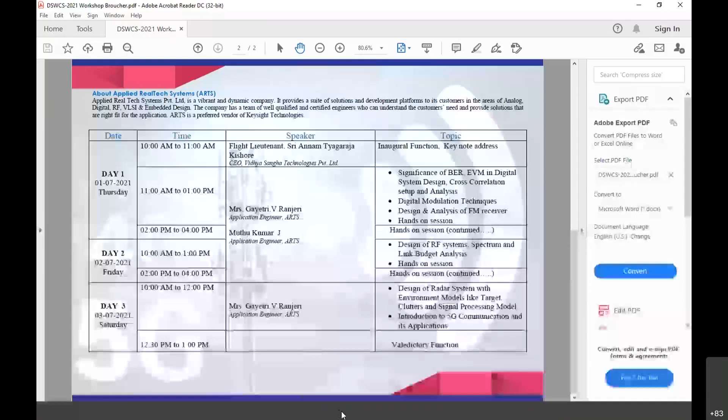He has acquired international exposure through working in USA, France, UK, Singapore, Hong Kong, Spain, Abu Dhabi, Sri Lanka, Australia, and New Zealand. Mr. Kishore is well versed in providing system integration, global service centers, pre-sales and post-sales support on 3GPP, OMA, IPTV, and many more. He has rich experience in advanced research in optics, IP, wireless, wireline, business process, governance, and budget management.

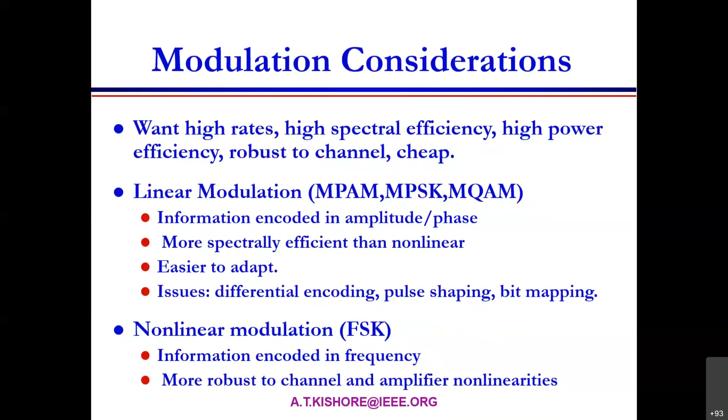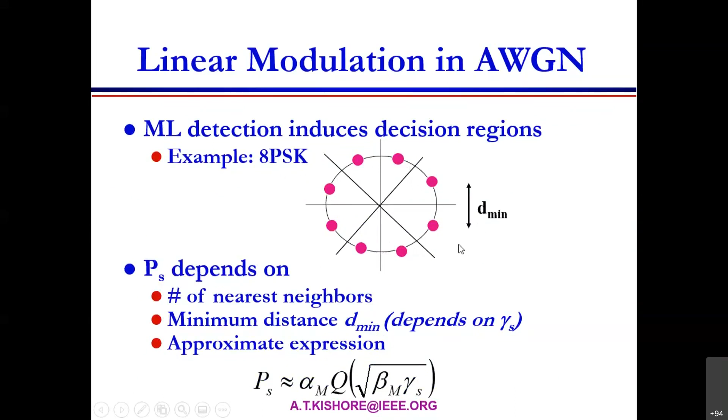These are examples of 8PSK, 8 phase shift keying, and the data conveyed here is 2 to the power of 3, which is 8. So using 3 bits, you generate 8 states.

These are some maths, and I would like to highlight there is also something called the Doppler effect. It means that if the transmitter is fixed at one place, like a tower, you won't see the Doppler effect. But if it is a train moving on a rail, and you are static on a platform observing the incoming train, you would see the Doppler effect of sound emitted by the train at its previous location and also at its current location.

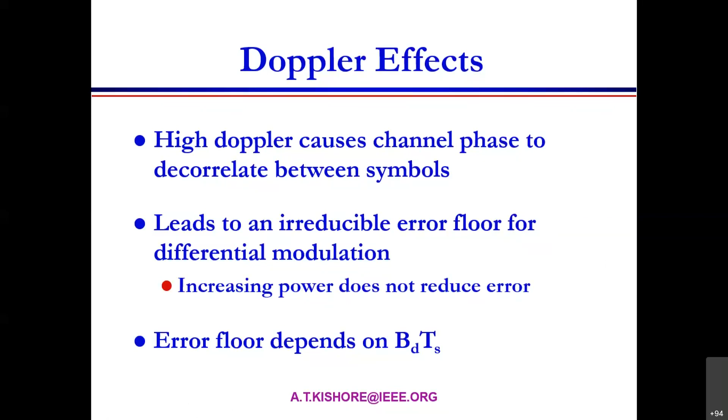There is an effect of overlap between them and beat frequencies, and so the Doppler effect can also be measured to give an indication of the movement of the object - something astronomers have also used to understand star movements. The same thing applies to wireless technologies.

Intersymbol interference, as I mentioned earlier, and capacity fading. To understand fading channels, in fact, that is what Indian spiritual masters tell us - that the world around you is full of noise, mithya. That's what technocrats also tell you, that the world around you is full of additive white Gaussian noise, and you need to get your signal-to-noise ratio resolved by meditation, dhyanam, and then you have to be sthita prajna. Typically that is how the wireless industry also gets down to the business of focusing on what you need.

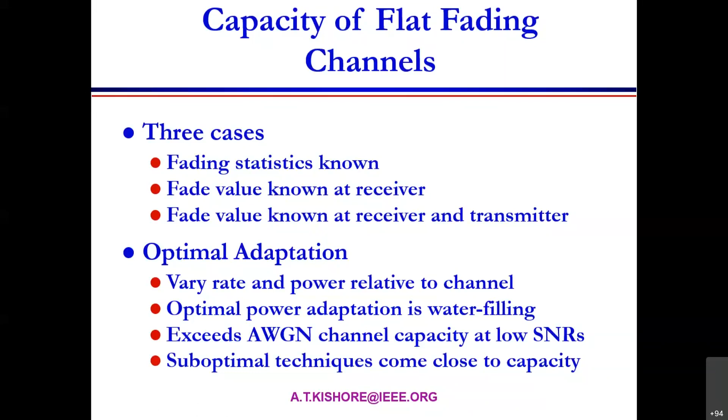This is how 16 QAM is very well articulated in these 4 quadrants, and you get 4 dots there. If you add all of them, it is 16 - 2 raised to the power of 4 is 16. So by using 4 bits, you can take a paper and pen, start with 4 zeros, and finally conclude with 4 ones. You will generate 16 variations of them, symbolically mentioned in these various colors here.

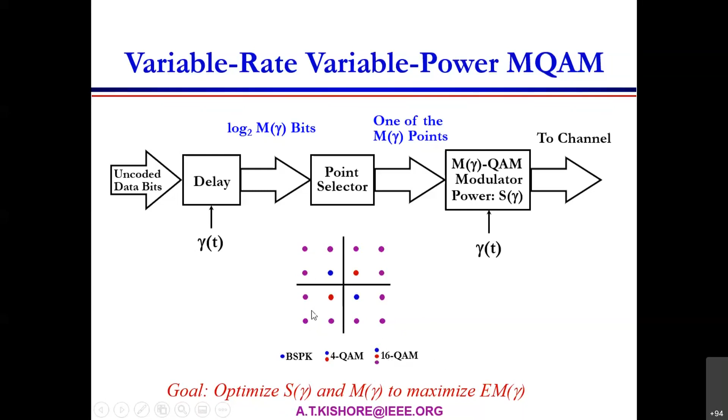And so this is the 64 QAM. When you talk about 64 QAM, keep all these 16 in one quadrant and populate the other 3 quadrants - then that becomes 64 QAM.

So basically, how do you go about wireless channel modeling? You have to look at the phase constellations, the power, the error in estimation, and the delay. These are the parameters that the test equipment will take care of to get you the signals you are looking at in your practical lab. We have to use techniques of selection combining, maximal ratio combining, and equal gain combining.

Maximal ratio combining is like what Warren Buffett or others well versed in the stock market do. The algorithms of maximal ratio combining go by which of the stocks you invested in are giving better results. You increase your portfolio and you arrive at the profits. This is the concept used in wireless processing.

So you have the explanation about how MRC, maximal ratio combining, works, and also selection combining.

Maximal ratio combining gives you like a 40 dB gain against the Rayleigh fading, which is the story I told you, like there is a mountain of ignorance and a heap of darkness, just like a volcanic explosion. Before our current civilization, there was one mountain in Indonesia that exploded, and the whole world went into a cold era.

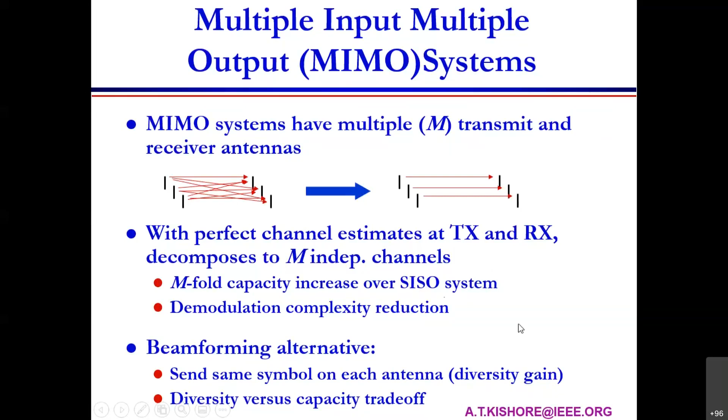So there are some more equations. I would like to talk about a few concepts. One is called OFDM, orthogonal frequency division multiplexing, and FFT, that is fast Fourier transform.

Any discussion about wireless or signal processing requires knowing about the life of Fourier. This was a boy whose teacher ignored his potential merits as a student, calling his parents to tell them their son was no good because he could hardly see anything, and that he was no good for studies and they should take him away. But later, this boy with imperfect vision opened our eyes to a lot of rigorous mathematical applications, without which most advanced technologies in DSP could not exist now. Fast Fourier transform is thanks to Fourier, Jean Fourier.

Similarly for OFDM, especially researchers and students, take a paper and I'll tell you the formula for the LTE OFDM philosophy in 3 components. The first component is 14,000, multiplied by symbol, and then 1200, again multiplied by 6. So these are the 3 components.

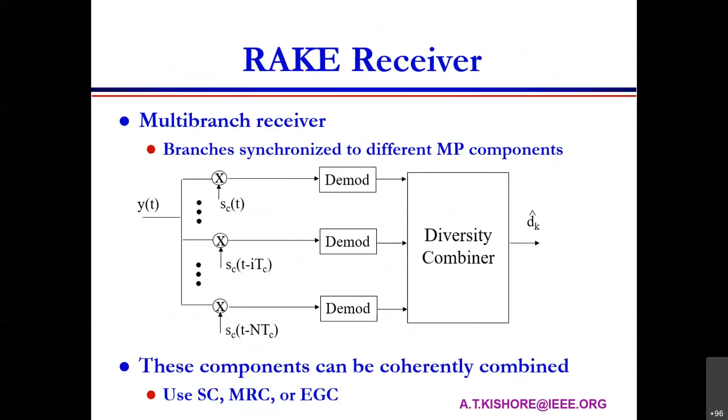The fading channels, we will go through more details—Dr. Gayatri will cover that. I just want to create an awareness that all these things exist, and I have a few more videos as well. First we will go through some and then see how much time we have to go further into discussion.

In telecom, Aloha is a very interesting concept. It means when randomly many people try to access a channel, especially during a random access attempt, the Aloha algorithm creates randomness so that no two mobile access attempts collide. Their attempts are randomized so that there is very little collision.

This is a very interesting diagram of cellular technology. GSM gave birth to the hexagonal design pattern. When it comes to 5G or LTE, every hexagonal pattern uses the same frequency like any other hexagonal system. You distinguish one user from another using codes which identify the base station, the device, and the channel—three codes in total. One identifies the tower, another identifies the device, and another identifies the connection between device and tower. These three codes help mitigate the fact that the same signals are used around by all other towers.

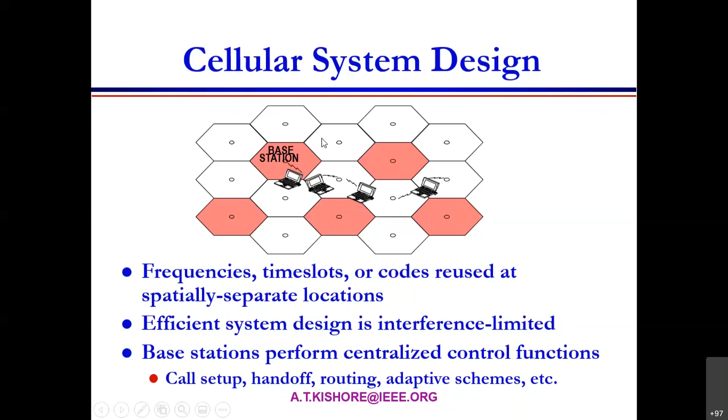That is the concept. In case of GSM, there was a requirement of frequency planning, but in 5G, LTE, or WCDMA, there was no need to do frequency planning.

These are some design considerations, because these three day talks are all about design considerations. So you have to know, let's say you are designing a fresh 6G network for Bangalore city—5G is already taken care of by telcos, 6G is a research topic, for example. How do you go about designing 6G? You have to know the reuse distance, the size of a cell, the ways you get interference, what kind of antennas, what power levels including antenna gain, whether there are multi-user detection technologies, and how resources are allocated. If you know these things, you can even model the 6G technology. By the way, 6G is a combination of terrestrial and non-terrestrial, typically used in satellite communication.

Resources in wireless include channels and bandwidth. For example, GSM is based on 200 kilohertz channel bandwidth baseband. CDMA is based on 1.23 megahertz channel bandwidth of baseband. 3G is based on 5 megahertz or 3.84 megahertz baseband channel, and LTE is based on 20 megahertz baseband channel. 5G can have various spectrum baseband allocations even beyond 20 megahertz, which is standard for LTE.

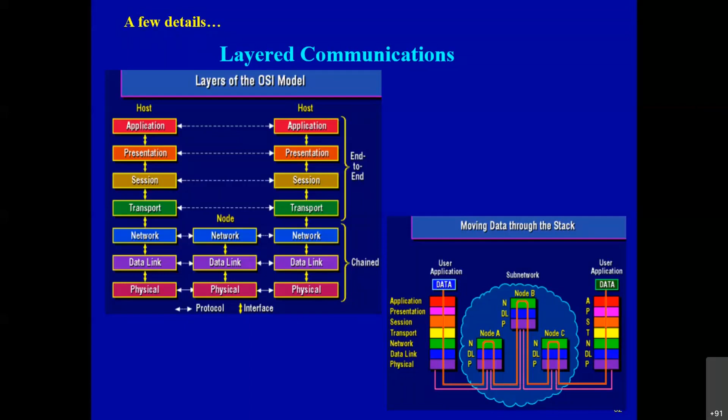Every channel will have data that gets encrypted and transmitted, and there is propagation, and the receiver will remove the noise, then decrypt the data and get the intelligence back. So this is the typical flow of any communication channel.

I would now spend a few more minutes on 5G as it is being introduced worldwide. There were unintended consequences of movies like Robo 2, even in the Western world. It is okay that villagers may get influenced by such a movie and think birds are killed by 5G and want to destroy wireless towers. In the movie, the hero destroys one wireless tower and feels triumphant, but there are millions of towers and billions of users, so that story is not scientifically valid. Wireless is not causing harm to birds as you perceive. Birds may be at danger due to various reasons, and radio communication could be one of the sources, but not just 5G.

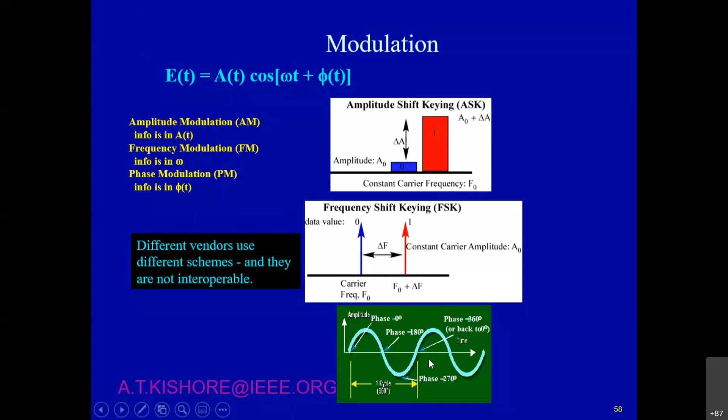Starting from here, you will now roll out amplitude shift keying, frequency shift keying, phase shift keying, and QPSK. All these technologies work by manipulating the amplitude A, the frequency omega, or the phase phi, and that is how you get ASK, FSK, and PSK modulation standards. And this is the global frequencies electromagnetic spectrum, starting from 0 hertz to infinity.

Industrial, scientific, and medical bands have been opened up for free. Our WLAN is based on 5.3 gigahertz, and 2.4 to 2.5 gigahertz is allowed as a free band without license fees. All these frequencies are used in various applications: 433 megahertz typically is used in drones, 915 is used in GSM, and 2400 megahertz is used in WCDMA and also WLAN.

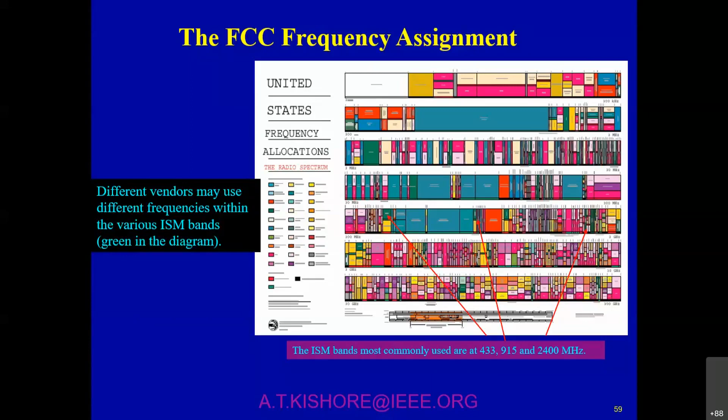The tiny sinusoidal waves which are orthogonal to one another - you bring out 1200 of those waves in 20 megahertz. So out of 20 megahertz, take 1 megahertz to the left and 1 megahertz to the right, and you are left with 18 megahertz. Divide 18 megahertz by 1200, you get 15 kilohertz. That is a sinusoidal wave known as a subcarrier.

So beyond FDMA, TDMA, CDMA, we have OFDM, which is used in LTE, and 5G New Radio uses a flavor of that with variations in the slot duration and also subcarrier frequency baseband allocations.

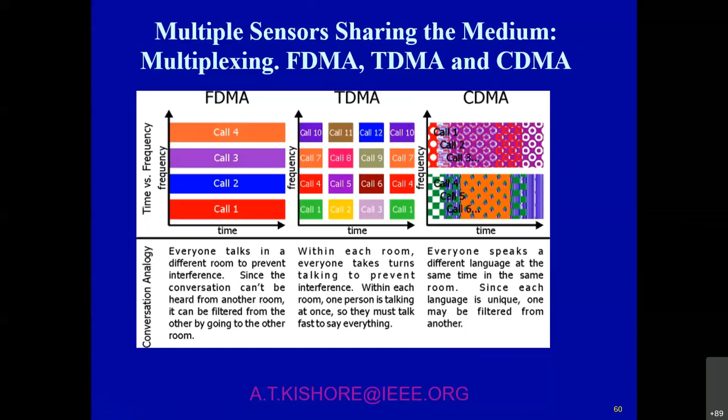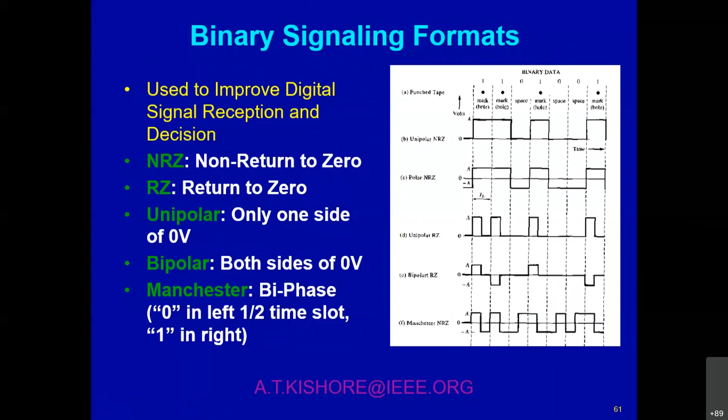As I mentioned, the lady Hedy Lamarr was wife of a Czechoslovakian army officer, and she was a host for her husband's guests - living-in officers who came to seek advice from the senior officer who was married, and spend time socially. She was serving food when they were having conversation, and they were talking about how to attack my enemy by randomly changing my transmit frequency, and again change the time at which I transmit, and change my location from which I do my attack.

All these concepts of randomization, like direct sequence spread spectrum, frequency hopping spread spectrum, which became a basis for WLAN as well as for CDMA, was originally a thought process that Hedy Lamarr gave to the patent office, which was utilized by the militaries.

When America had a challenge from Cuba, Fidel Castro was challenging Kennedy, the president of America, that he would use Russian kind of technologies with missiles and destroy entire America with their missiles. So they used the white paper written by Hedy Lamarr in terms of creating defensive channels, and used it in an aircraft, and in the jamming pod they went into Cuba and nullified the radars which could no longer see the incoming flights. Then these flights were able to see the radars and destroy the radio communication systems. So modern warfare is that ability of the enemy to wage war - electromagnetic warfare.

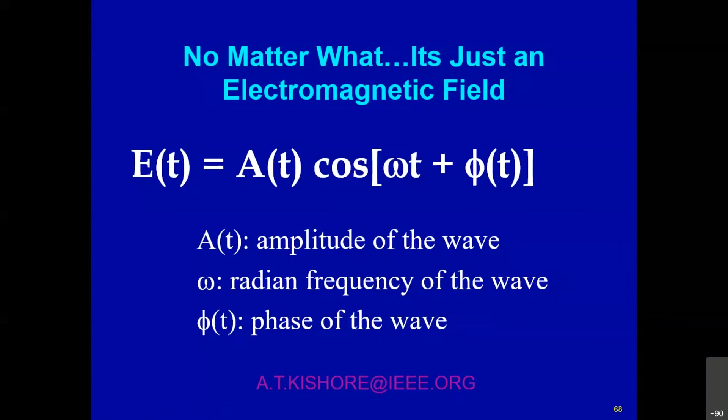This equation is the parent of all wireless channels, just like classical Newtonian equations are for physics. At one point, the world was thinking seriously about WiMAX. 802.16 happened to be the next layer after WLAN, but it did not really take off, and that was replaced by LTE, as you all know. Now that is again being replaced by another layer on top of it, the 5G layer.

These are some of the traditional computing networks, like routers. In the future, there will be very little distinction between telecommunications and packet data internet. So they will both be the same.

So when Dr. Gayatri and others take you through a lot of discussions, they will also talk about computational fluid dynamics and other tools like ANSYS, SolidWorks, COMSOL, and various tools on MATLAB.

In fact, we work with a few tool makers to help the emergence of the ecosystem, like incubation centers. I'm one of the Niti Aayog's Atal Tinkering Labs Mentor of Change, and also for Smart India Hackathons. I'm part of Bureau of India Standardization for the UAVs.

We welcome any expression of interest from researchers. If they want the license keys for about a year, we are ready to give them free of cost if the need is genuine, which when purchased would be of the order of something like 66 lakhs for a number of users. We are doing this in the interest of the ecosystem, and we are partners with a number of tool makers. So with these few words, I have a lot of other videos as well.

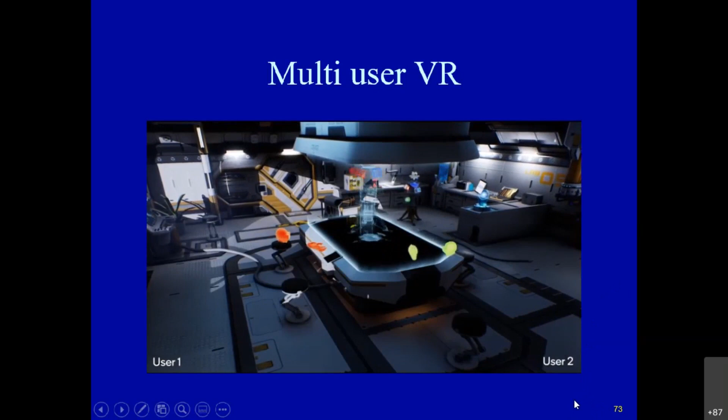We're showcasing multiple VR use cases, including multi-user collaboration and gaming running on a single network. As you can see, users 1 and 2 are in a multi-user VR collaboration, while user 3 is using a VR gaming application.

We now illustrate the processes involved in a boundless VR system. The VR device sends 6 degrees of freedom head pose data to the edge cloud over 5G. The edge cloud processes this data and renders a new image, then sends the compressed image back to the device over 5G. The device further processes the image before displaying it.

The time taken for this round-trip process is called M2R2P, or motion to render to photon latency. The 5G round-trip time is a key component of M2R2P. High latency causes user experience degradation; the user may observe warped objects or delays in the appearance of new objects. Low latency can remove such errors.

We now showcase how our end-to-end 5G optimization allows us to meet the stringent low latency requirement of multi-user boundless XR. In this example, all 3 VR players are using the NVIDIA Cloud XR solution and experiencing 2K by 2K resolution at 90 frames per second. The 5G round-trip time is kept below 20 milliseconds, and the average 5G downlink throughput is about 50 megabits per second.

In real-life deployments, RF and interference changes are a frequent occurrence, which can cause performance issues and latency spikes. In this example, we see a VR user being blocked from the gNodeB by another user, causing a sudden spike in 5G round-trip time for the baseline 5G system. Our 5G optimizations help minimize the latency spike, providing a seamless user experience.

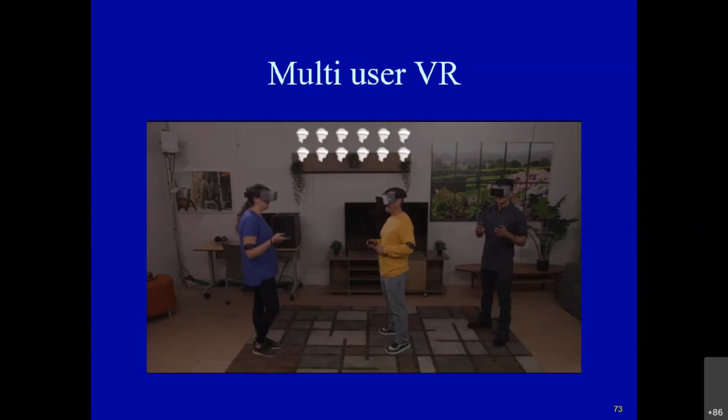We have an exciting path ahead to evolve the boundless XR system to include larger networks and augmented reality use cases.

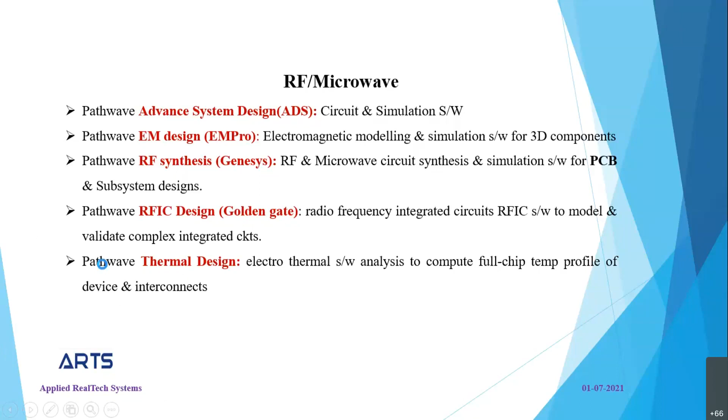So I'm going to give a brief about advanced system design, and then I'll continue with the system level design, with respect to RF and microwave. So this is how ADS looks, and this is system view.

So I'm going to cover the entire content that madam has designed, which EIT has designed, using system view. I'll just give a brief about ADS.

So we have, like I said, this is how it looks. This is Golden Gate. So in this software, what is the simulation technology that it uses?

We have all these softwares, all simulation softwares. ADS is also simulation, system view is also simulation, EMPRO is also simulation, Golden Gate is also simulation. But what simulation are you going to do? It gives an accurate result with respect to your design.

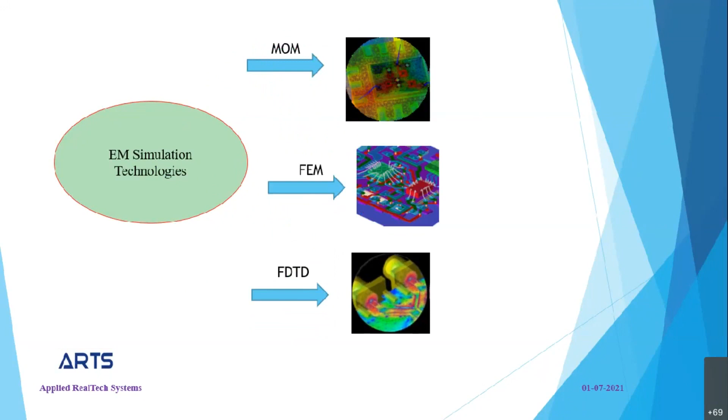So we have different simulation technologies that all the software uses. One is method of moments, another is finite element method, FEM, and another is finite difference time domain method. So we have 3 different technologies it supports.

ADS supports this, and when you use ADS with EMPRO, it supports the FDTD method. You can design your antenna in EMPRO as well as in ADS. Once you design your antenna in ADS, that can be called in EMPRO so you can do simulation using FDTD method.

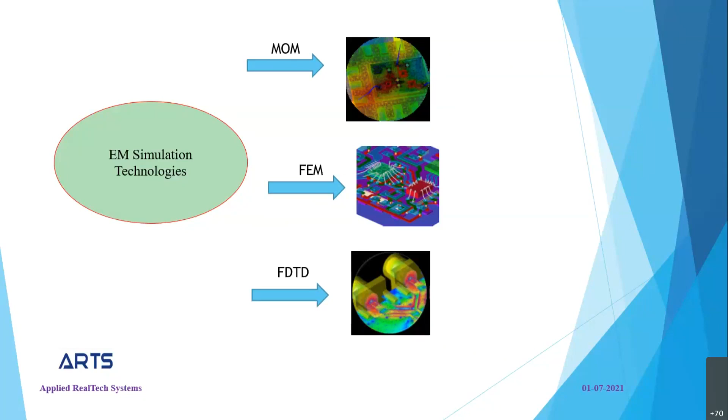So this is just a basic difference about method of moments. It is used for planar and passive circuits. FEM is also a frequency domain method, and it is used specially where packaging is done and wire bonds. And finite difference time domain is a time domain method, used where the wavelength is large, such as antenna.

So I'll just give a brief about ADS. It is very much easy. It is an electronic design automation tool, which can be used for RF design, microwave design, high-speed digital applications. It is also used for designing circuit design, and for layout.

It can be used for co-simulation. It is also 3D EM technologies. It is also used for IC packaging and PCB. And it also supports different types of library files, for example radar satellite applications, it can be used.

So whatever features I've mentioned, I'll show in terms of figures. So first point is, it is used to capture the schematic, and it also used for designing, you can do layout design also. And it is a system as well as a circuit simulator.

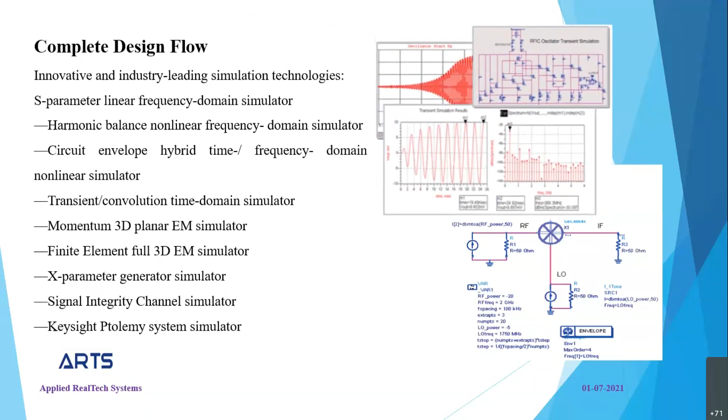So this is exactly how your graph looks when you're going to design and when you want to display and see the result.

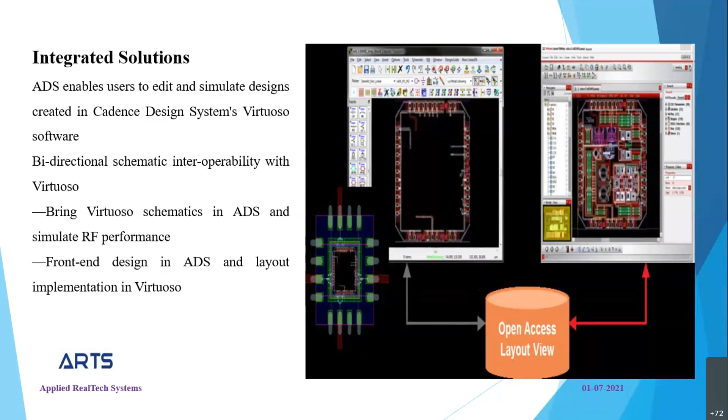It can be integrated with different vendors, such as Cadence, Zuken, or Mentor Graphics. And nowadays, even Synopsys is supporting this, Synopsys is also in hand with Keysight currently.

And these are the different foundry partners. What we are doing here is with a third party for what you are going to design. For example, if you design your circuit, say a basic capacitor, the value it produces can be checked with your third party, that is called a PDK file.

We call it a PDK, that is process design kit. You can transfer files with PDK files, that is ideal values with respect to your design value.

So, no optimization technique. In ADS, we have different optimization techniques, 12 optimization techniques we have. We have a cockpit which modifies the value with respect to your design, and then it will give a display. You can see in this box there's a green color which is modified, and the value is modified here, that can be seen.

So this is optimized. We have different types of optimization techniques here. According to your design, you can use different optimization techniques such that you get a proper desired result according to your design.

So if you want to design an antenna and simulate FDTD, that is finite difference time domain, then you have to have EMPRO software with ADS. Then only can we simulate FDTD.

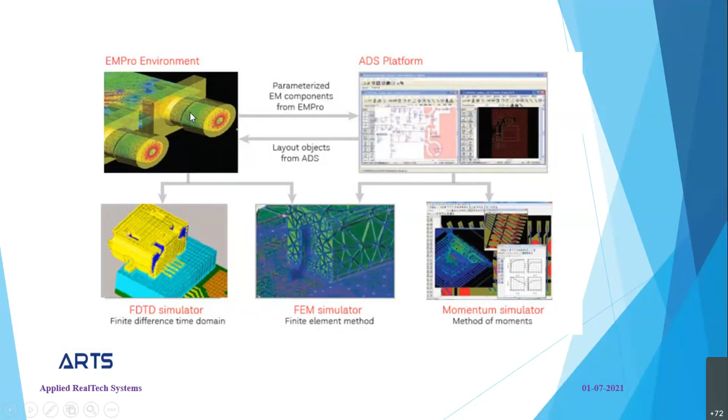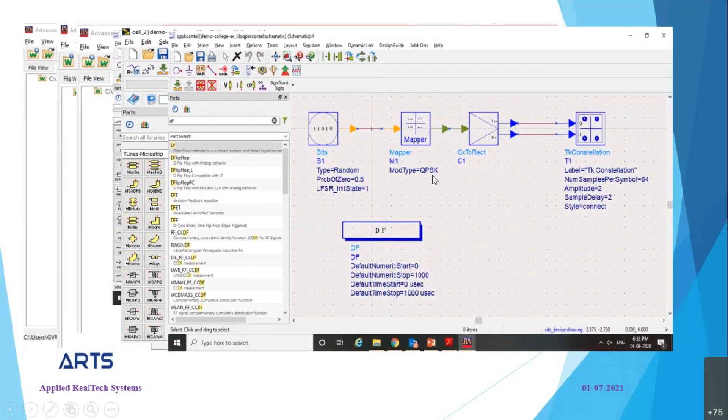So this is one example using QPSK, you can see a basic, normal system level design can be done, not the higher end, but to some extent we can do system level design even in ADS.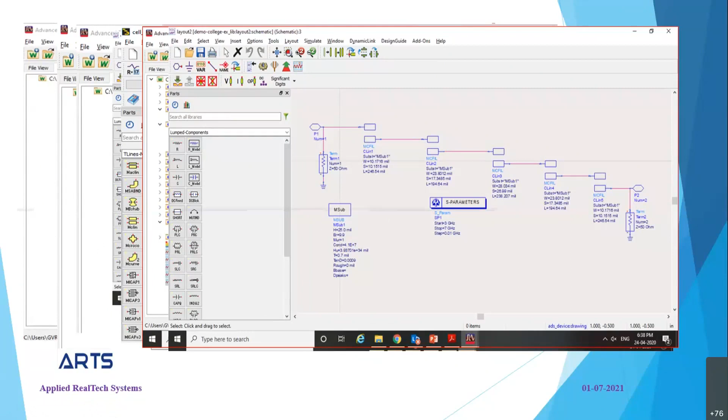Just go for this, this is layout. Just click on layout, generate. It will generate whatever the schematic has been done, the same thing appears here in the layout. Everything is just converted into layout with one click. So this is where you display it.

You can see different types of display for your result, like using a Smith chart, rectangular plot, or you can write your own equation. You can also form a tabular column. Everything can be done here.

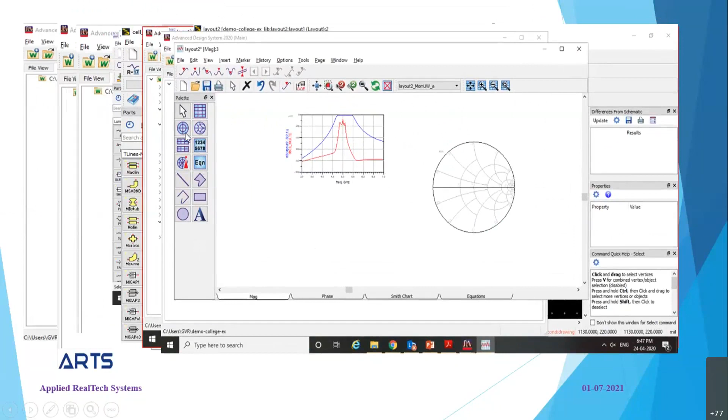So this is one antenna example design, a patch antenna example design. There are multiple antennas, some cross designs. So this is about the ADS.

This is actually the basics about the ADS. So who all can use this ADS? These are the people who can use it - RF and microwave designers, especially board designers, system integration designers, power electronic designers, signal integrity designers, MMIC designers, RFIC designers. This ADS can be used by all of them.

So aerospace and defense people, MNC people also use it. Even in education, some colleges are using ADS. So ADS can be used for UG projects, PG projects, as well as in research for simulation, and it gives proper accurate results for your design value.

You can check and cross-verify your design value. If you are not getting a proper value, then somewhere you are making a mistake while selecting the value of a particular component. And this ADS can be introduced in any of your laboratories.

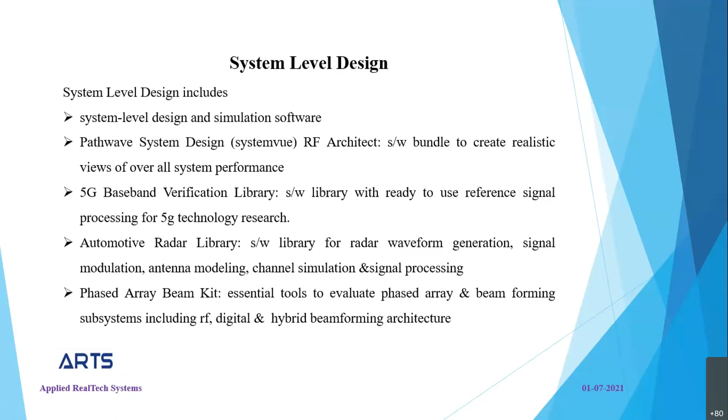So what exactly is the SystemVue? SystemVue is nothing but a simulation. It is a simulation platform. It's a system simulation platform.

Where it can be used with respect to the baseband and analog or RF design, or different types of channels, where we can design all these things. So I said, no, this is a simulation platform. We can use it for baseband, analog RF, and different environments.

So what are the target applications for this? We can use it in aerospace and defense. You can use it in upcoming communications like 5G, and even for 6G the library files are still being built, so as days pass we'll get different library files. And even the current trend is automotive, we can use it there too. For example, in automotive, you can use it for radar or communication or vehicle-to-vehicle communication. That part also we can do here.

So who uses SystemVue? Wherever you are in the design, at the base level or the architecture level, or at system verification, you can use it. So whether you are at the system architecture level, the baseband level, or doing system verification, there you can use SystemVue. Wherever you are in the design, no worry, you can use system level design.

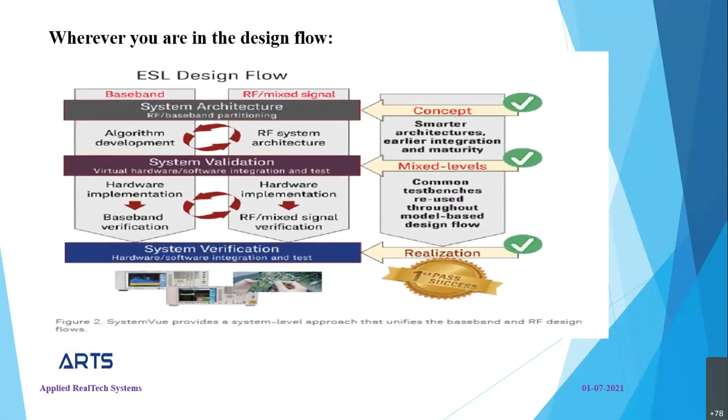I said, no, wherever you are in the design flow, it will support. SystemVue can be integrated with different tools, like I said, it supports MATLAB, it supports different measurements, and it supports different types of software available with respect to any hardware components, and even hardware designs it supports. We can call these instruments in SystemVue and check your real-time signals, whatever you have designed.

For example, this is one example, a screenshot taken for radar design. If you want to do radar design, you can create a radar system level design in SystemVue. Once you create a system level design, if you want to see an animated signal, meaning an animated kind of design, then we can use STK from AGI. STK software, where we can see an animated signal, animated kind of models.

For example, we can see the aeroplane, that kind of signal, to see what is the clutter, meaning the target, whether this target is reaching the radar or not. That part we can see in terms of animation using STK.

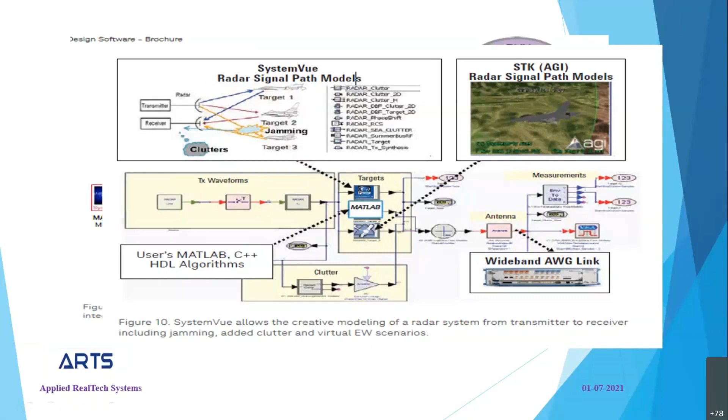This SystemVue also supports third party software. That is what this indicates. You can do coding using C++, HDL, or MATLAB. And this is a phased array.

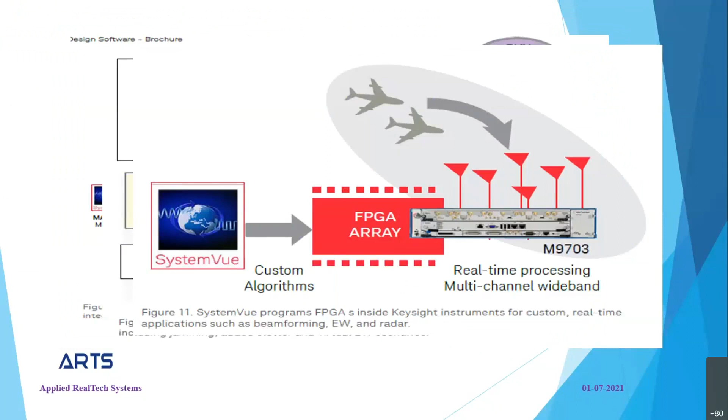So what are the capabilities of SystemVue? It is very accurate, and it is faster compared to other software. It is more speed and very accurate, and it's flexible also. And it even keeps track of all your designs. For example, if you already run 8 designs and close this window, when you open it again, it will display all 8 designs available in the main screen window. And it is very easy to use.

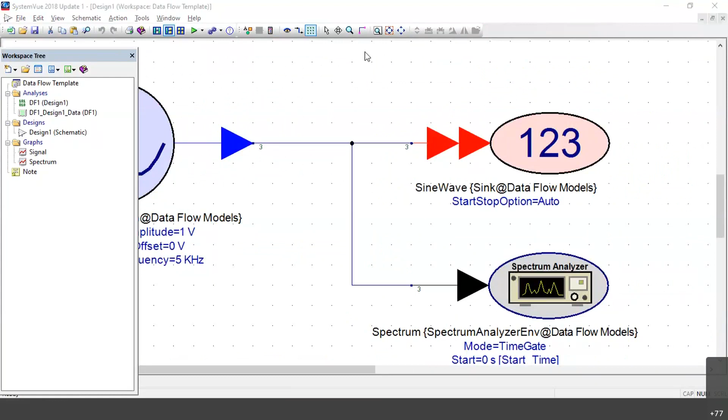See, when I pressed on the template, this is what it's showing. I'll close this all. See, this is a data flow template - it gives notes, meaning a description about the data flow design and how it can be created. And this is your schematic. I'll just fit the window.

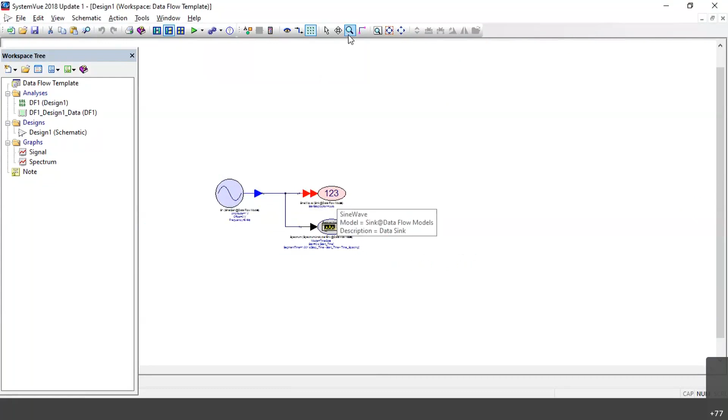See, in the schematic, what is there? Just one sine signal. Then you are going to see the output either in terms of spectrum or the normal signal. I'll zoom this - see, what is here, one sine signal. Then this is your sine wave, and this is your spectrum analysis - you can see it in terms of spectrum or the normal signal.

I'll minimize this. And then this signal is showing - this is a 1 to 3 sink. This is a normal sine signal that we can see with a different time scale and a different amplitude.

This is the output of a diode? No sir, it's just an example of a sine signal. No, not a diode? No madam, sine signal - you are giving where?

This output spectrum is of - sir, this is a schematic. This is where I took a sine signal. I'm not doing anything, just displaying a sine signal in terms of a spectrum and in terms of the normal sine signal. This 1 to 3 represents the normal sine signal, and this spectrum analyzer expresses it in terms of the spectrum. Fine sir?

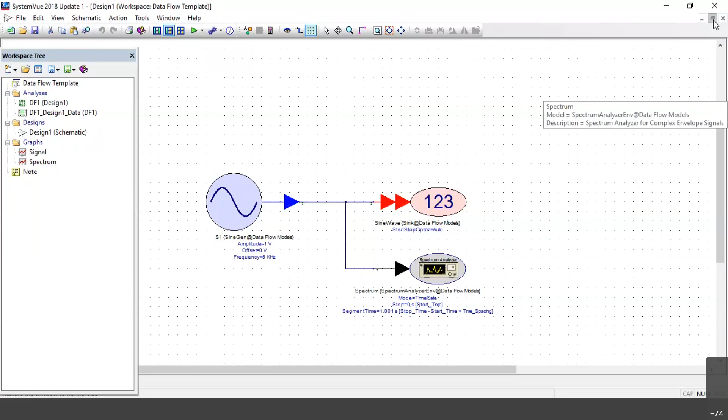Thank you, yeah I see sir. This is in terms of spectrum, and this is in normal 1 to 3. It is in the output.

I just took one template. I'm not designing anything, I just showed what exactly the template looks like. The template gives complete information about the particular design, basic designs.

So once this is done, these are all the things it gives. And here in the workspace, we can see the name of your file. This is a data flow template, and what type of design - your design is a schematic. This is your design, like an amplifier design.

That is, it is nothing but the simple amplifier, right, so or the op amp I can call it. So this is a design - the name of the design is design 1, and it is a schematic.

Once you run this, you will get an analysis. And in analysis, what all does it do? It will display all your required results. I'll just press on this.

See here, you can say start time and stop time, sample rate, number of samples. Number of samples can change according to things. These are the samples that can be chosen here. And what is the time spacing and frequency resolution? See, these lines correspond here. If any change happens in any of these things, there is a change. For example, if I change here to 128, see, there is a change.

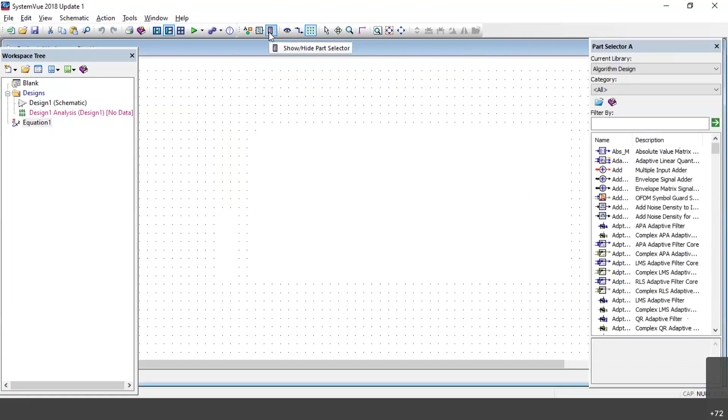Analog devices, right, with respect to system parameters, automotive radar parts, Bluetooth parts, CDMA parts, CDMA 2K parts, Coilcraft, custom - there are multiple things available. This is an instrument, Flex OFDM parts. This is one instrument that can be integrated, so that can be used to see your result also. So GNSS parts, GSM parts, different HSDPA parts, LTE, MIMO, radar, RF design, WiMAX, WLAN.

So currently it supports different WLAN parts, fine. So these are the different parts that are available, fine. And even my system, my software is the 2018 version, so it is not showing 5G library parts currently. So these are the different parts available that can be used, right?

Again, if I say general or all in category, if you don't know any part numbers properly, you can use all, and then you can search here, filter by. If you know particularly what you want to use, with respect to adaptive, analog RF, beamforming, or code generation, there are different instruments available for use.

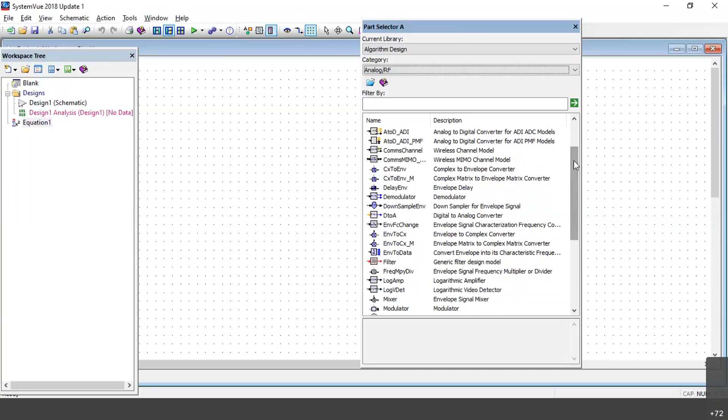Earlier it was there, madam, can you expand RF design in that, it may be wireless channel? Can you expand wireless channel now? Yes. Previously it was there. Is it in the current library? No, in communication, I guess. Channel types, what channels are available? Madam, these are the communication, comms channel, wireless channel model.

Madam, if you installed it, you can go through it, I'll give some time so you can look through it, and if you're not able to find what you're looking for, let me know. These are the different things available in different library files. If you know what exactly you're designing and what's needed, you have to select the library files, and these are the things available for you to use.

It's not only communication, we also have adaptive equalizer, RF, and beamforming. For example, if you go for beamforming, we have transmit array, S parameter, we can do modeling of the S parameter, envelope matrix delay. There are multiple things there, madam. I'll give some time so all of you can go through the part selector to get familiar with these things.

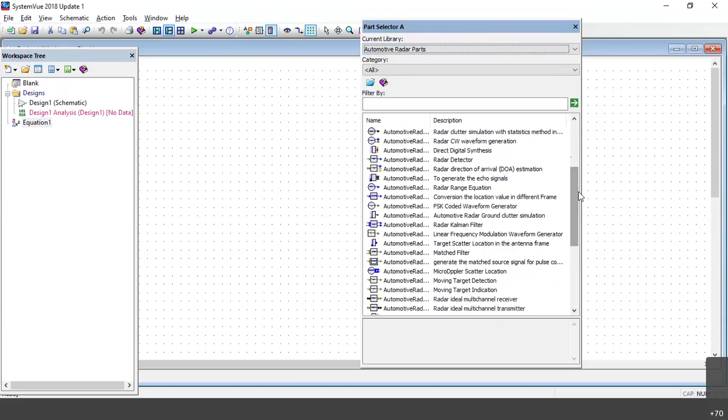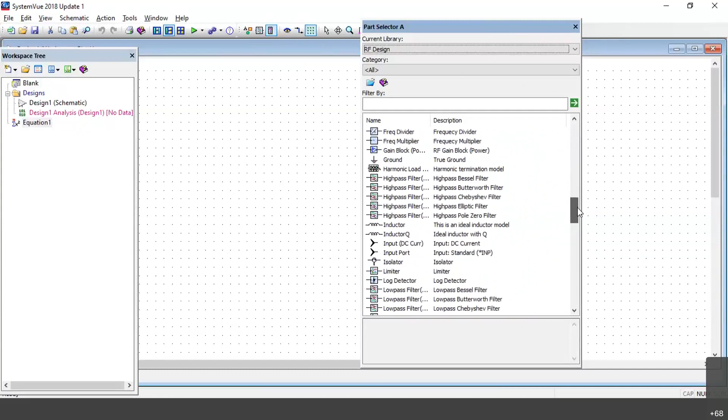If I go to automotive radar, again there are different things with respect to only automotive part, so we can use all those. Even for RF design, we have different RF design parts here. For example, attenuators already exist, bandpass filters, different filters, and coaxial cables are there. If you know which coaxial cable you want to use for your design, that can be used. We also have dividers, different switches, different ports, detectors, and limiters. Many things are there. I request all of you please go through this part selector.

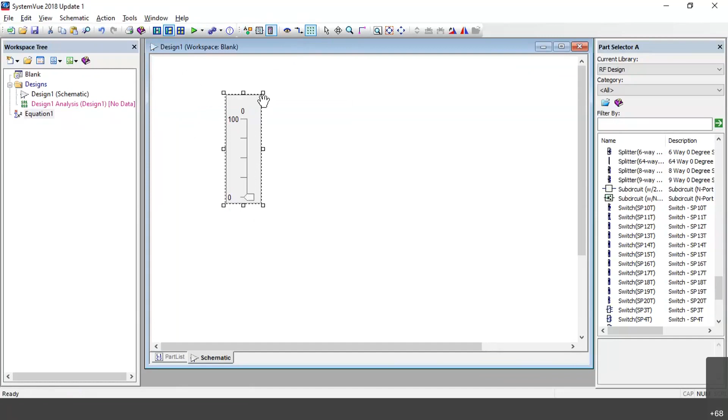And this is if this part selector is not available, your part selector is not visible. Then either you can select from here, or you just press on this, or you go for view.

You can activate the part selector, or if you want to see the simulation log window, you can view and click on this, you can select that, or whatever you want to use. Even if you want to use command prompt or the compilation log, you can select and it will be visible on this screen.

Suppose I select command prompt here, this command prompt is visible here, right? So I don't want it, so I didn't use it here. I just closed this. Whoever wants to use this, they can use it. Okay, all the things, fine.

In the schematic, we can create a new schematic, right? Or you can add your title block, or if you want to place your schematic properly or fit it in the proper page like this, instead of dragging and dropping and making the window small or big, you can use fit page or reapply auto designator, all these things you can just go through once.

This is the action to run the simulation. And this is a tool where you can see with respect to library. You can see with respect to license, that tool can be seen here. See, it is also supported. Golden Gate simulation setup we can support here. This system supports this. That's all.

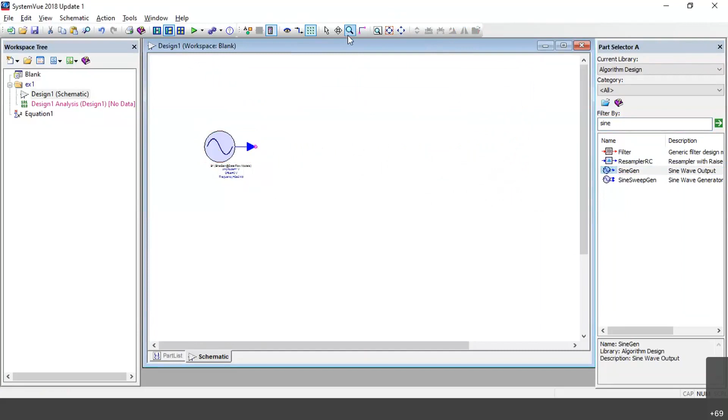Sine signal, okay just click on this. This is the sine signal I got. I'll make a zoom. See, this is your zoom screen. Click on the zoom.

When you click on the zoom, see here what all it is. It's showing this is one outgoing arrow mark with a blue color. And here, what is the name of this symbol? It is S1, sine generation using a data flow model.

So we are using a data flow, not an RF flow model. It's showing data flow model, meaning we are going to generate a sine signal of amplitude 1, offset is frequency with respect to 5 kHz. So if you want to change amplitude or frequency, all these things, you just double click on this.

Double click on this sine symbol, and then you can change the name S1, change the description also, or let it be as is. If you want to change the model, you can keep it as data flow model - if data flow model is the only one available, you use that. If different models are available, you can select different ones. Currently it's data flow model because we are in data flow.

So it is showing data flow model. Now in this model, it is showing what is the amplitude, what is the offset, what is the frequency, what is the phase, and here advanced parameter. If you want, these things are available here.

These are by default, and units are given here. What units do you want? You can change the unit in different terms. So here are default values, already given as a default value.

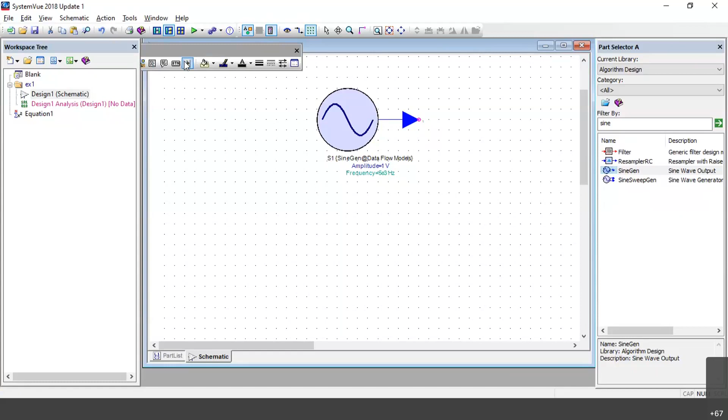So I can change it, how you go for annotation - then you select this part, slider. Then you just place the slider. You can change here, see here, you can change this. You can change the slider.

Oh my goodness, it is not working. Okay, I'll show this later. You can tune this frequency.

So this is one sine signal I took. If you want, you can take another sine signal only with a different phase shift. I'll take another sine symbol.

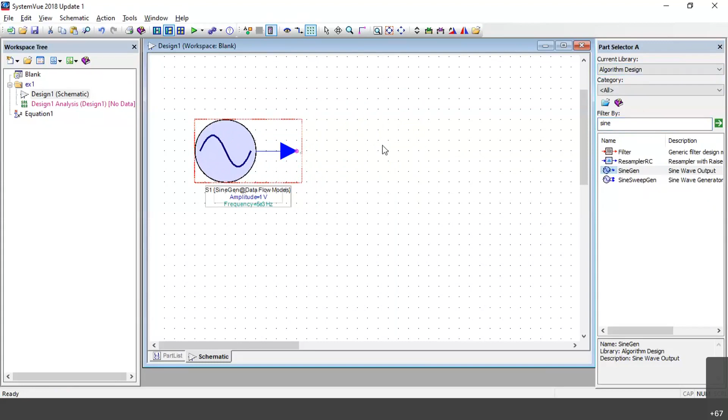Instead of going to the part selector, I can select here only. I'll just copy and then paste. So I got it here. Instead of going again, you just make a phase shift of 90 degrees. So I'll add a sine signal and a cosine signal.

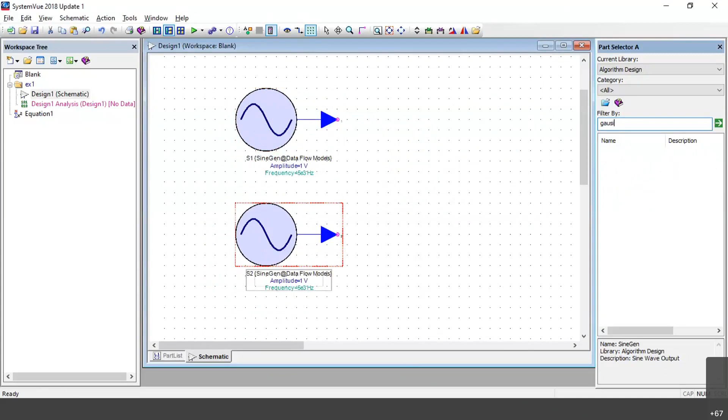So two signals I am taking, or you can take another signal also. You can take a Gaussian noise, any other signal. If I've got a Gaussian noise, I'll take this independent identically distributed Gaussian noise. I'll take this Gaussian noise.

And then I'll place it. Are you people following me? Try to do along with me. Then only you'll come to know, you'll be familiar, otherwise it's not possible.

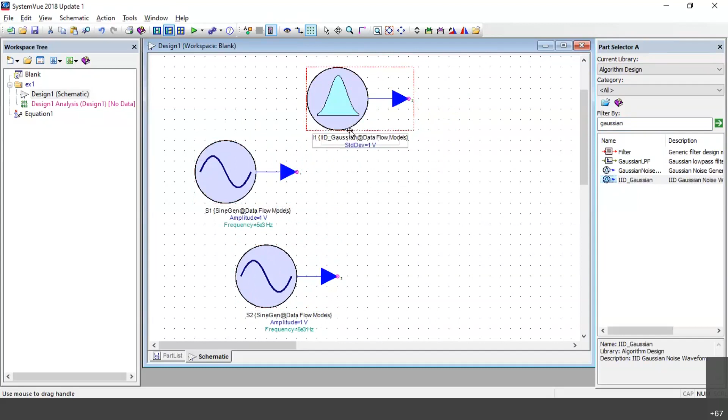Then again, if you want, you can double click on this. You can see what all the things are there. You can change the standard deviation value to 0.1, some value - it's not particular, I'm just doing here some value. Just say okay.

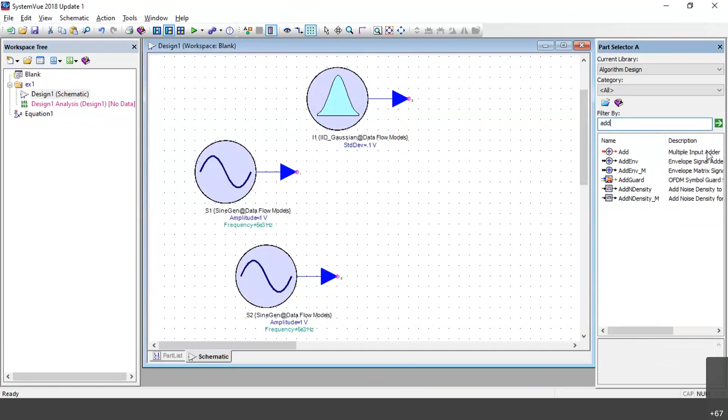Now I want to add all these three signals. Then you go here again, filter design, filter by add. Just type add - so what do you want to add? Multiple input adder - see here, there are multiple things available here. I will show you here. Adder means there are multiple adders available.

Which one to select? That is again important for us, right? If you want to add general, then you take add - with respect to envelope adder we have. If you want to add multiple, that is matrix, then you have to use M - the last letter should be M.

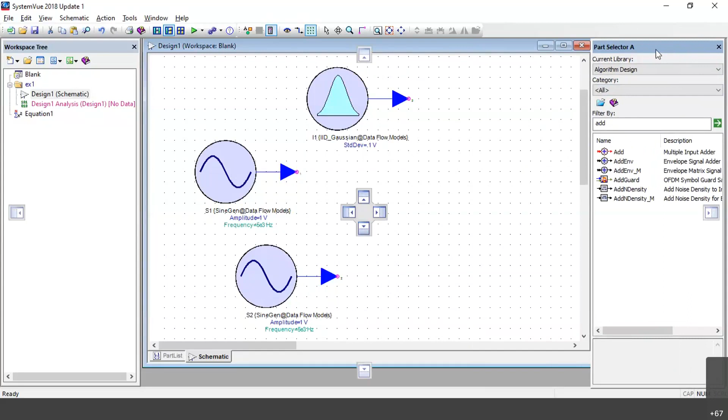M represents matrix - wherever in whichever part you go to select, if there is M, then it is representing matrix addition or matrix multiplication. So I will take general add over here, I'm not going to take matrix because I'm not doing any matrix multiplication or addition here. So I'll take add, place it on the schematic. I'll just write fit to - okay, then see here, in matrix multiplication, sorry.

In addition, there are three terms, so I am adding three terms. See here, there are red marks, two arrow symbols. These two arrow symbols indicate it can add multiple things. Multiple addition can be done, so multiple inputs can be taken here.

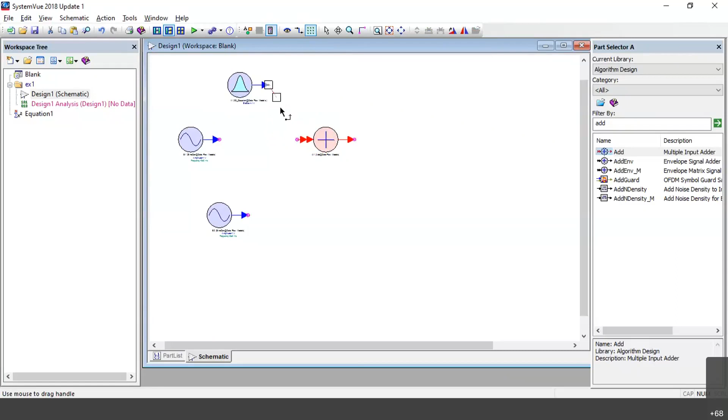Now to connect all these three to this, you can use this wire. Click on this wire, or directly place a cursor on the arrow mark where it will be visible. I hope all of you are getting how to do the connection. Just do the connection like this, then add. I hope all of you got it.

This again, there are two more instruments here: signal vector signal analyzer, of Keysight. So I'll use a sink, data sink. Connect for data sink here. Place one click on the sink and remove, take the cursor on the schematic, just one click.

Now after this, connect this sink, data sink to the output. And one more thing, this is a general output I want to see. If I want to see the spectrum, then you just type here spectrum, then press. See, only there is one spectrum analyzer that you can see. Again, you can connect here from this point to this point.

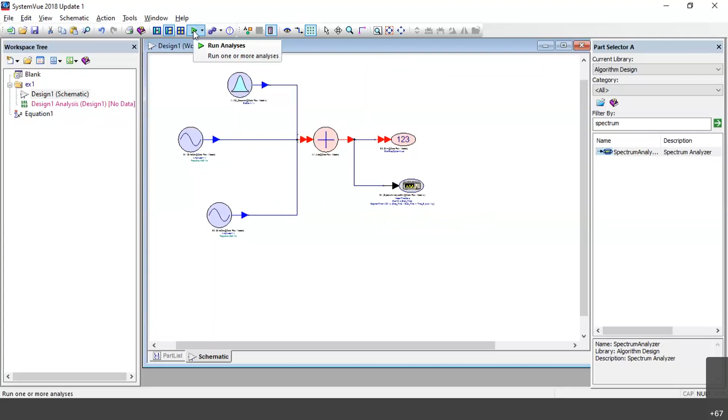See here, I have to run the analysis. I can run the analysis, but before that, go for here, example 1, come to the workspace, come on example 1. Here, add, come here, right click, add, come down. You can select what analysis you want to do. There are 4 types of analysis.

That is 4 types of analysis we have. One is data flow, because I'm designing a data flow module here, so it's a data flow analysis. Another is phased array analysis, RF system analysis, and system C analysis. Currently I am using data flow analysis, so I'll use data flow analysis. I will not use anything else.

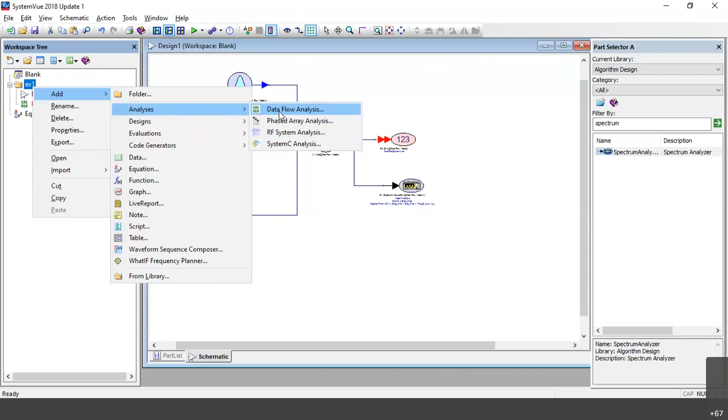These are the different analyses. Currently I have data flow analysis, so I am using data flow design. It's already present over here, so I'm not going to add another analysis. So when it is not there, when you're going to create a new folder, then you can add different analysis according to your module.

Now it's already there, then I'll see here. Currently, if I double click on design 1 analysis, no data is available. You can set up your start and stop time, sampling rate, or anything, power of 2 or whatever it is. I'll just say okay. I can say here calculate now, or directly I can do run analysis.

I'll show what will happen if I do run analysis over here. So I run the analysis. See, I did not get any error. So here, earlier the data was not available, right? Now the data is available. So design analysis 1, the data was not available in the earlier one. Once it is run, it gives another design 1 analysis data, meaning the data is available now to see your result.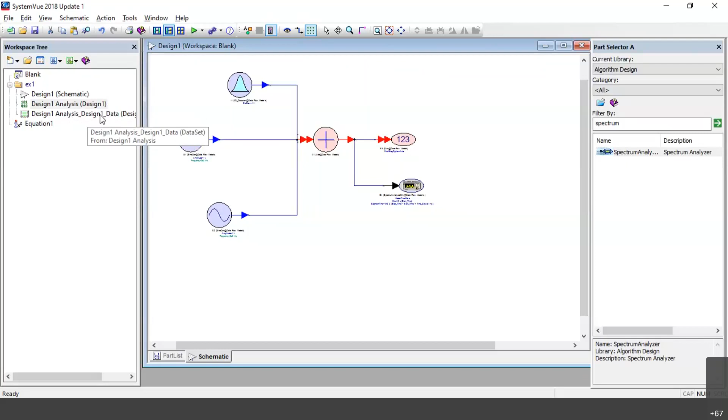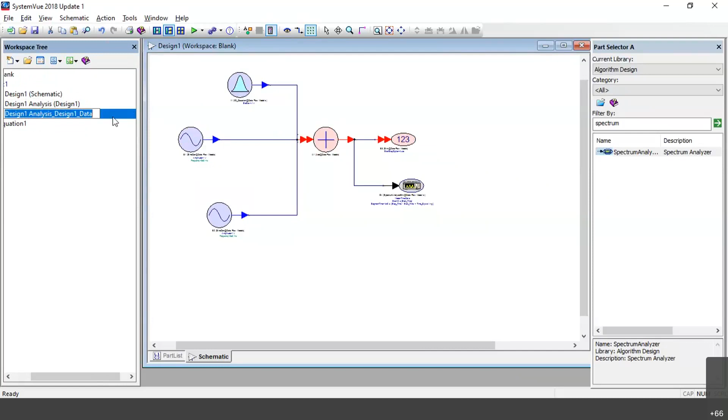You can click on this design 1 analysis design. You can even do calculate. If you change any modification, you can do calculate now itself. Now where the data is available, there is a graph, this green graph. So click on this, double click on it. You should get another pop-up window showing all the output result. So it is showing in terms of a time graph as well as the normal points, time value points.

And these are the different things available, you can check.

Just a second. Just a second.

Hello, see this. Now see here, what are the things that can be done here. You can see it different with respect to time, with respect to phase. You can see it in terms of power. All the things can be already visible.

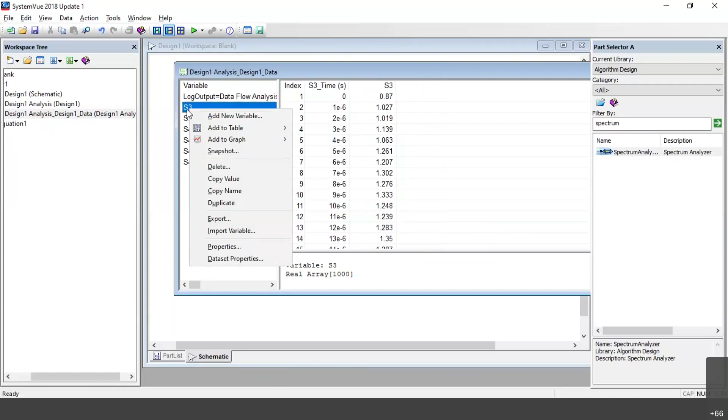If you want to plot a particular graph, I want to plot S3. Then right, keep the cursor on S3, right click, add new variable, or add table, or add graph. I will go for add graph.

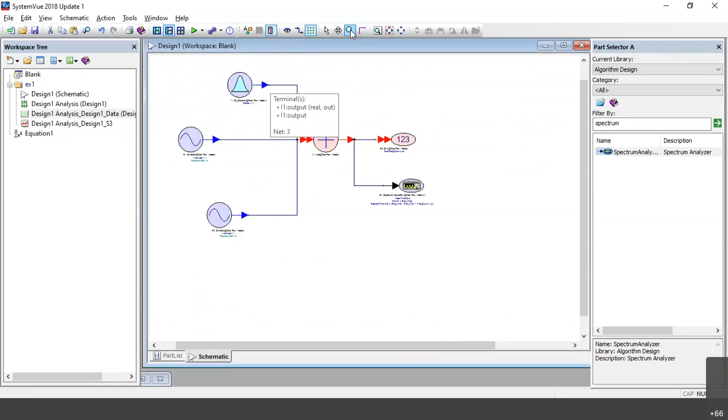Simple, see, I'm getting it. Now, what is exactly S3? If you want to see what is exactly S3, then I have to go for my schematic. What is exactly S3? Because, see, where is my exactly S3?

S3 is nothing but the output of the normal signal graph. If I want to see S4, S4 is my spectrum analyzer, right? I can see here, either I can see here or I can see here at the design.

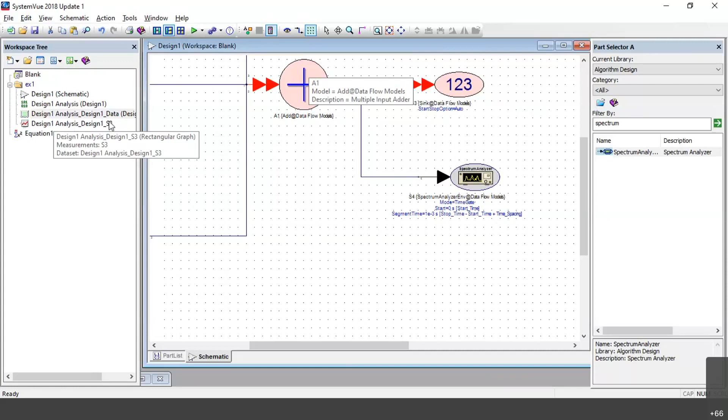Once I click on this particular thing, particular sink where the data is available, then it will give one more graph, that is design 1 analysis of design S3. So it is giving S3 output. So this is output. If I don't want to go here and plot a graph, then in the schematic itself I can plot a graph at a particular module.

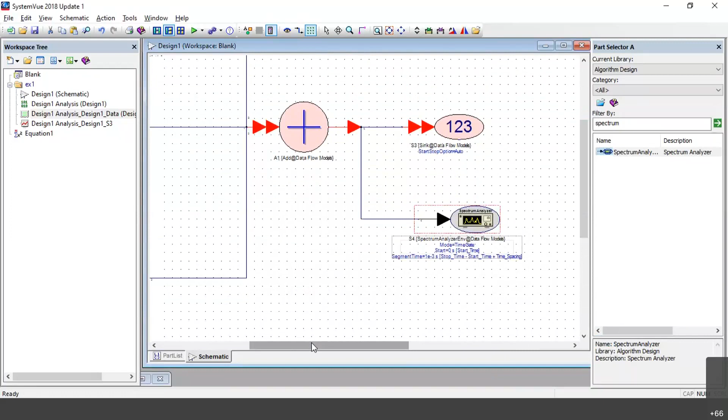That is, see, keep the cursor on 1, 2, 3, right click. Sorry. Oh sorry, not here, I'll show this later. Come here, design schematic, click on this.

Add graph, example one, right click, add graph. In that graph, what all the types you want to display? You want to display constellation diagram, or eye diagram, or histogram. We can plot different types of graphs.

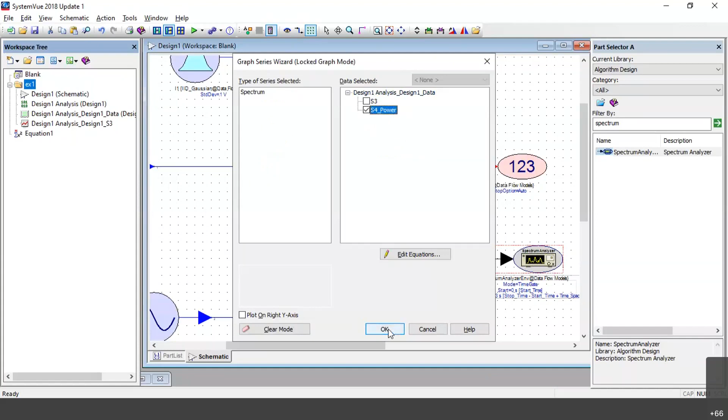I want to see one normal graph and one spectrum graph. So if I want to plot a spectrum graph, what is available with us? So what is a spectrum? So I want to draw the spectrum of S4, this part, right? This is S4. So I will just plot S4, and then if you want to change anything in this S4, you can go for edit equation.

You can change here, see, S power, you can change the value here. Using design analysis of design data, it is showing the design name you have designed, and it is S4 power. You can change this value here. Okay, I'll just cancel and say okay.

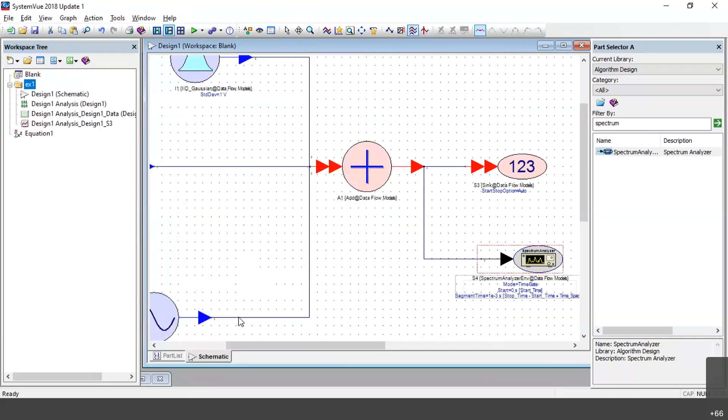Color is red, you can select any color. I'll select some other color. Any color, I'll say okay. See, this is a spectrum graph.

Okay, some spectrum graph we are getting. We didn't design any particular proper thing, right? So we are not.

Similarly, if you want to add, or if you want to add in the same graph, see here where it is in the same. So adding 2 signals, I am getting some signal. Adding 3 signals, I got some signal here. Adding 3 signals with noise, I got 2 signals with noise, I got the signal. This is all a corrupted signal with noise.

You can see the particular value by placing the cursor on the particular point. It will display all the values. The way you are going to change it, that way you're going to display. So this is how you are going to do it.

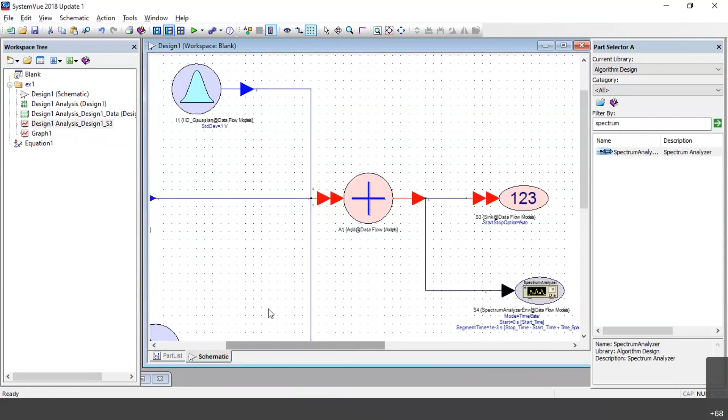Now I'll change it once again. One more thing I'll show you in this part. If you want to see adding, we got a proper output, right? We added two signals, we got something. Now, if you want to see this signal at this particular input and this particular input, there you can connect.

One more over here, take a sink. I'll just show sink and you can connect it. Sink is meant for seeing the graph, this output. Okay, place sink and then you can just directly connect to this, and you can see here. Then just go for run analysis and it will show.

When you go again, it will show one more thing. Again, either you can run here or you can run here.

Okay, I hope all of you got familiar with SystemVue, so that in the afternoon I can go with how to generate bits, how to check bit error rate, how to analyze error vector magnitude, cross correlation, right? If you have any kind of equation with you, let me know so that I can go with that, or theoretical design.

Can we modulate the signal? Yes, sir, we can do modulating signal. I'll show an example - in place of the adder, if we connect some other device to see the output, suppose you connect a source in place of adder and want to see the modulated output, is that possible? Yes, sir, we can see all the things.

This is just a normal basic example I've shown to make you familiar. I'll show how exactly QPSK modulation can be done, or how we can do all these things, in the afternoon.

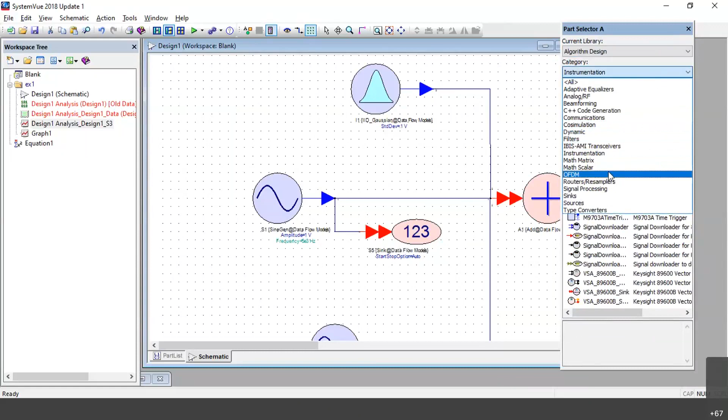I saw a question in the chat box, that's why I interrupted. This is the co-simulation - you just asked about ADS import to SystemVue, how we do that.

So whatever you design in ADS can be called in SystemVue with the help of this co-simulation feature. If time permits, I'll show how exactly the co-simulation can be done. Otherwise, if time is not available, we can make a separate call where I'll explain how exactly to do this.